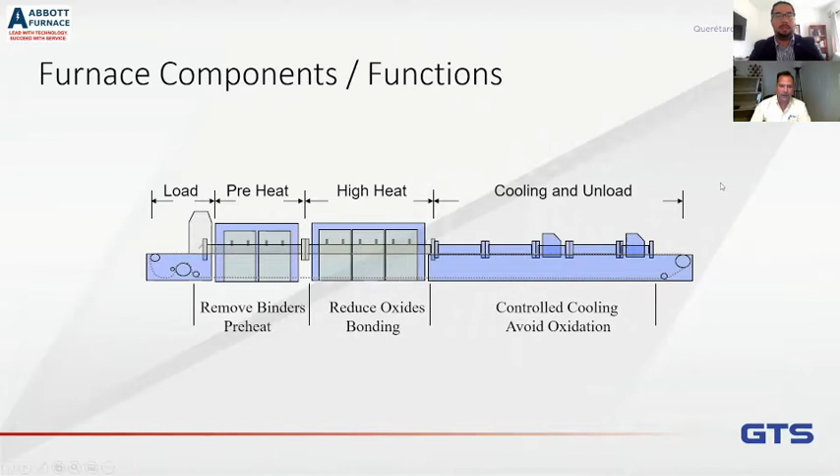Right, so from GTS's point of view, because that's what we do, the most important thing for us is temperature and atmosphere. So probably we need to talk about temperature, and temperature profiling is kind of a must. Exactly. A temperature profile is a graphical illustration of the furnace's performance. You can break furnace performance into three things: time, temperature, and atmosphere. Correct, and that time goes into both - it goes into the atmosphere as well as the temperature. So the only way that you know whether your product has seen the appropriate temperature for the appropriate amount of time is to do this temperature profile. Correct.

Now, one thing you need to be careful of when you do these: one mistake people often make is plotting temperature versus distance. Depending on the speed you're traveling, you could get graphs that look similar, but the actual time you are at temperature is significantly different. So you always plot temperature versus time.

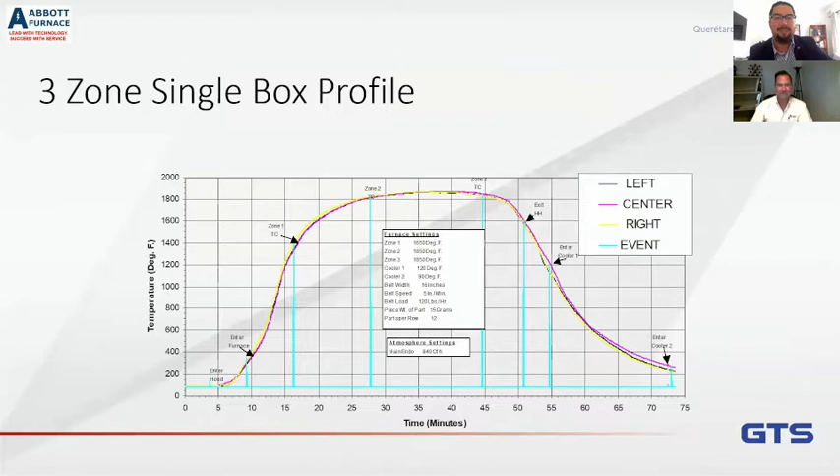So the next question is, why should we run a profile, or when? Well, there are 2 reasons you run a profile. The first is to establish a baseline. You should always run a profile when you're making good parts, because that tells you—you already know you're making good parts, you have a healthy process—so you should establish what that profile looks like that achieves a good part.

Then, in the future, if you have a problem, you can run another temperature profile and compare them to troubleshoot. You can say, well, in my baseline, in my good condition, in zone 3, I hit temperature X. But today, I'm not hitting that temperature. Maybe I have some elements out, or something has happened with the insulation. So I may not hit the temperature I need to melt the filler metal and braze.

We have always insisted that this is a tool, and it could be a proactive tool, because if you know this information from the very beginning, you know what your problem is, or is going to be. We really encourage you to run this at least every 6 months, because you'd rather plan a downtime as opposed to be forced to go down at a time that may not be good for your production. If you're proactive, you can stay ahead of repairs and plan things accordingly.

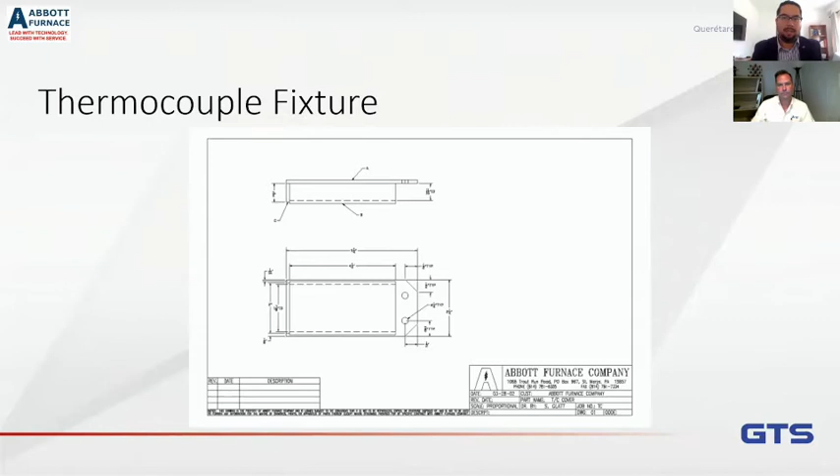Be sure that you're not up against the wall. You want to measure the inside, because so often, whether it's a fuel rail or some type of container, they're hollow, they're empty on the inside. So don't put that up against the wall, so it acts similar to a hollow device or a part. And then we put a little bit of insulation, just a little bit of fiber in the back, just so that the atmosphere, you don't get a chilling effect.

And that can be a computer, it could be a data logger, or whatever. Correct. So you mentioned something very important, that the length of the thermocouples will depend on the equipment you use, right? Yes. Because the most common, or cheap, data loggers are external data loggers. So you have the data logger outside the furnace, and you start feeding the thermocouples while the belt is running. But we also have those nice pieces of equipment that are wireless... they're not wireless, but it's a really nice tool.

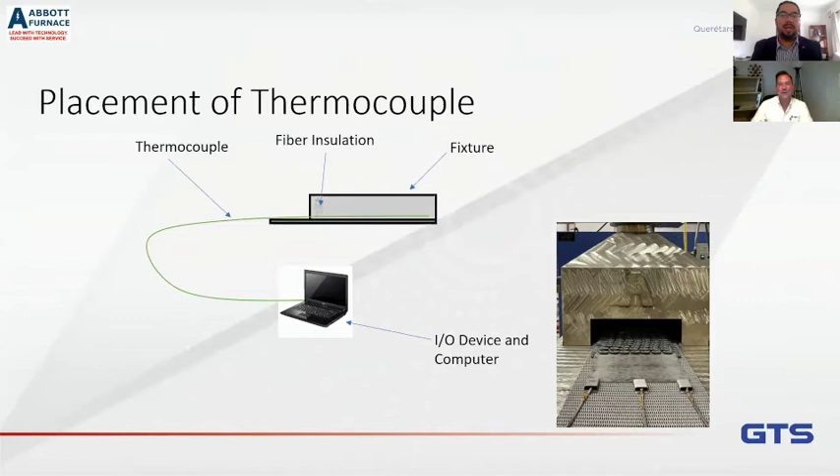Yeah, if we look at the types of equipment, you really can break it into two different schools, or two different technologies. One is a data logger, and the other would be thermocouples that go to an external device. And there are advantages and disadvantages to each.

For instance, the data logger, a common one is the Phoenix system. You can see here a photo of the Phoenix system, and that little data logger's big advantage is that it takes up maybe 2 to 3 meters of space on the belt. You can load ahead of it and behind it, so it makes it very convenient to run a profile. This is very, very widely used in the brazing industry.

Now, when you get into other industries like the heat treating industry and sintering, because of the length of time that they're going to sit, it's really nice. But there is a cost associated with them.

So if you want something very, very economical, much less cost, that's when people will go to thermocouples that come out to an external recording device like a computer, but the thermocouples are very, very long, and you are not able to load parts and have production while you're doing the profile. So you would load around the thermocouples, make sure that you load the same way each time, but you will stop your production when you're doing this technique.

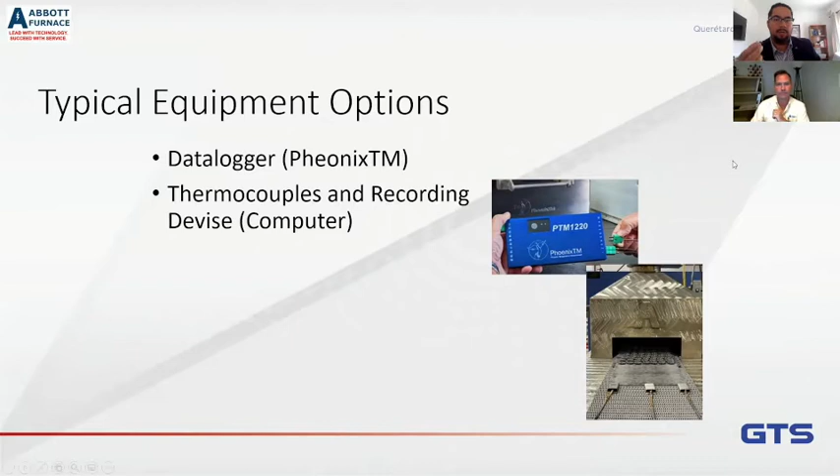Excellent. So, okay, we have our thermocouples, we have our data logger. What's next? Well, actually, this is one of the big advantages to the Phoenix system: there's software that goes with this, so when you bring it into your computer, you download the information. They actually produce a system that has telemetry, so it'll transmit as well, so you can do both.

You can actually get information in real time. And then, once we have the thermocouples and the fixtures, there's an enclosure. That's what we see in the picture, the data loggers inside of this to protect them.

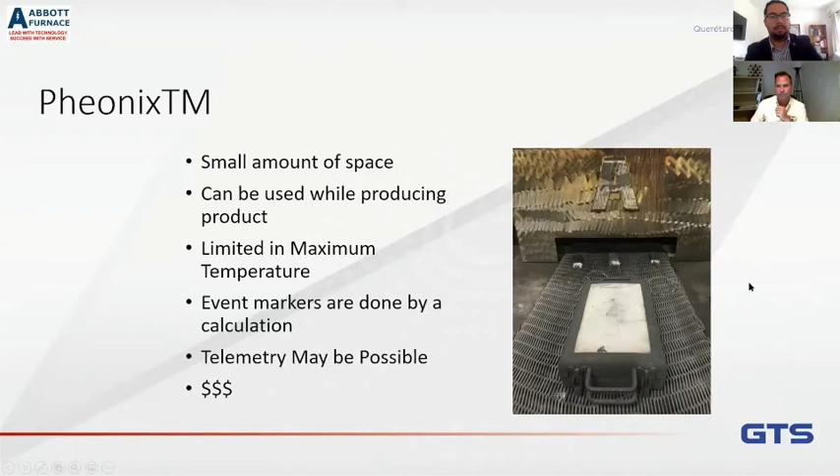In fact, here you can see how we would fit a data logger into a box, and you see it's very hot, and the thermocouples come out of the box, but the data logger is inside. So, like I say, you have the option to do downloaded data, or you could actually do wireless and telemetry with the Phoenix system.

So okay, we have the data logger, what's next? Well, once you get the data logger through, then what you want to do is look at that profile. You can see you're able to go in, put different event markers in, and see that thermal profile as it traveled through the system.

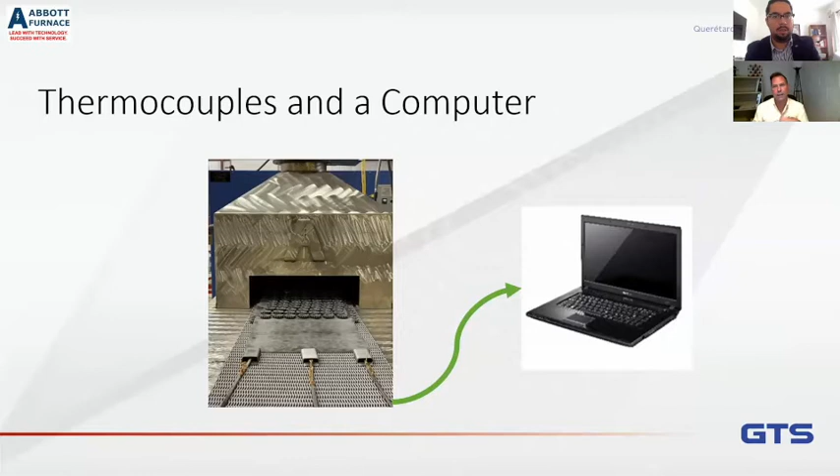And here, what you can see is in the case of being connected to the computer, you would have using data on the computer. You would then come in and record.

But this type of system, where you use the long thermocouples and the computer, is able to profile for extended time, because what happens is you start to have difficulty with the signal coming back when you get to event marking. You can actually use the thermocouple that's traveling through and mark it, so you have a physical indicator of position. Whereas with the Phoenix system, you have to do it based on belt speed and time.

But the other big advantage to this equipment is that the problem with the limitation of a telemetric system is that temperature is going to be your problem all the time, because there's a limited amount of time the box can resist temperature. For example, the longest time you can stay inside the furnace is about 4 hours for some systems. It really depends on the size of the thermal box, but that's something you need to think about when selecting the right equipment for you.

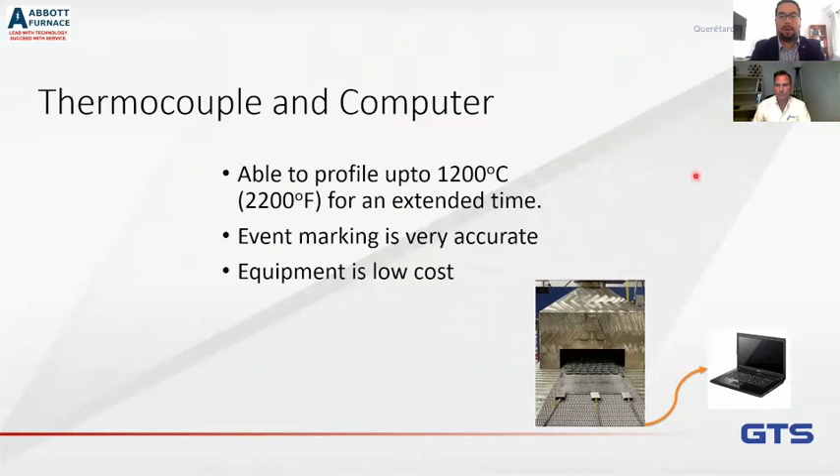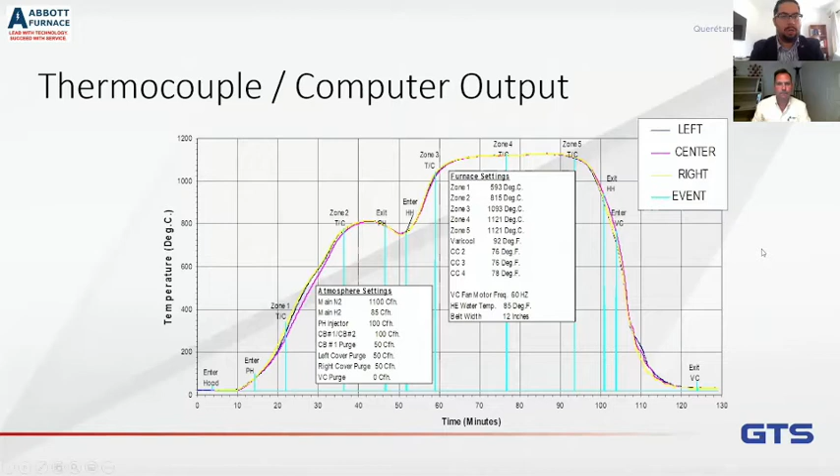Correct. So what would be, at the end, the overall procedure for the whole process? Yep, and like you had touched on before, the first thing we need to do is calibrate all of the controllers. Use calibrated thermocouples. You want everything to be traceable.

It's very important to always use the same atmosphere flow rates and the same atmosphere composition, because the atmosphere plays a large role in the way energy is moved throughout the furnace. For instance, hydrogen will absorb 14 times as much energy as nitrogen. So in cooling, if you had more hydrogen, the atmosphere will cool your product faster. However, in heating, once you've heated that atmosphere, when it comes forward into the hot box, it carries heat towards the front door even more than nitrogen would. So you always want the same atmosphere flows and composition.

Likewise, the same furnace loading. You want to compare an apple to an apple. Great advice, thank you.

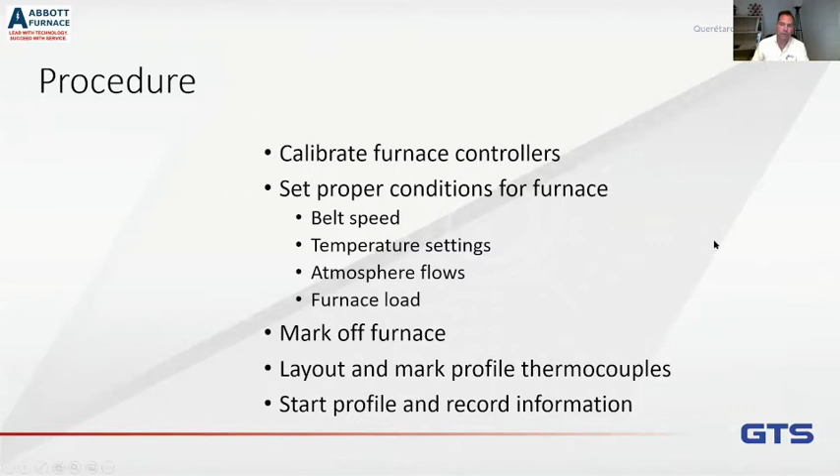So what's next? You have the procedure. I think one of the main things is to run your profile every time the same way. So exactly, when to do the profile? Well, you really should do the profile.

We really recommend that when you first get your furnace and start up your process, or if you've been down a while and turn your process back on and you're making a good part, do a profile. Mark that as success, this is a good condition. Then every 6 months, you should do another profile. That way you can be proactive in trying to head off any problems.

And you can compare that to your baseline. As things change, you can plan your maintenance so that you're always making good product. And likewise, if something does happen, if you have a failure or an issue, run the profile again to do the troubleshooting. That's really good piece of advice.

So this is for temperature. I think it's time to move to atmosphere. That's the other variable that always is going to be a pain for us. Yes, and they go hand in hand because atmosphere, you have reactions that occur in the furnace.

Remember what we said, we loaded the parts at the front of the furnace, and as we went through, we heated the product up and then we reduced the oxides. What's happening is we put our hydrogen and nitrogen in the back and they're flowing towards the front. That hydrogen will actually react with the oxides on the surface and form water. So what you see is the amount of water goes up as you go towards the front of the furnace, and the amount of hydrogen goes down slightly. That reaction is a function of temperature.

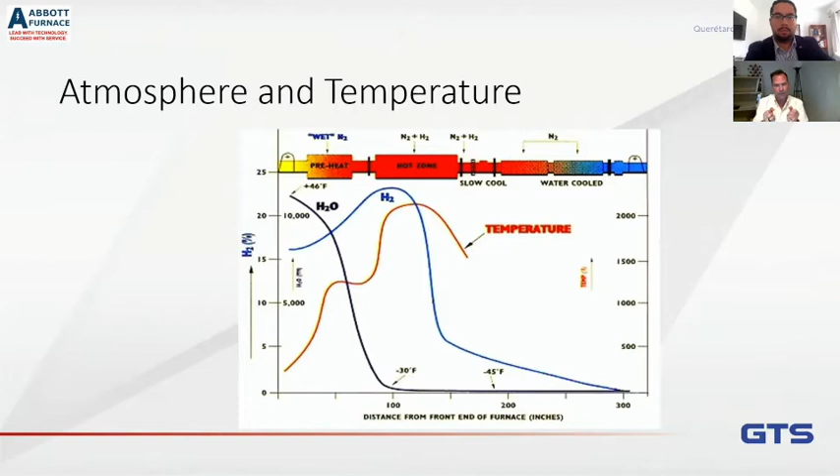But now you want to also look at atmosphere, because the atmosphere is the workhorse of your furnace. It's what reduces the oxides. It helps transfer heat, it helps flush away any oils that vaporize off, any of that. That does the work. Correct. Okay.

Perfect. So, well, we need to talk about why we use atmosphere. Yes, and that's why it's the workhorse, but it does two primary things: it prevents oxidation, and it reduces the oxides that are on the surface.

Correct, because in brazing, the first step is you heat up the product and then you reduce the oxides so that the filler metal can flow over the surface and form the alloy and form the bond. If you allow that oxide layer in there, it acts as a barrier between the filler metal and the base metal, and you won't get bonding. So those are the two principal functions of the atmosphere: keep air out of the furnace, and reduce the oxides on the surface of the metals.

The purpose of this webinar is not to talk about the science behind brazing, but just to keep in mind that the surface condition is basic to having good brazing. That's all you need. But maybe later we can talk about all the phenomena that goes into brazing, the wetting, the diffusion phenomena, that stuff we need to know. Yeah, because we need to understand what is happening in order to solve the problem. But probably for the next webinar, we can talk about that.

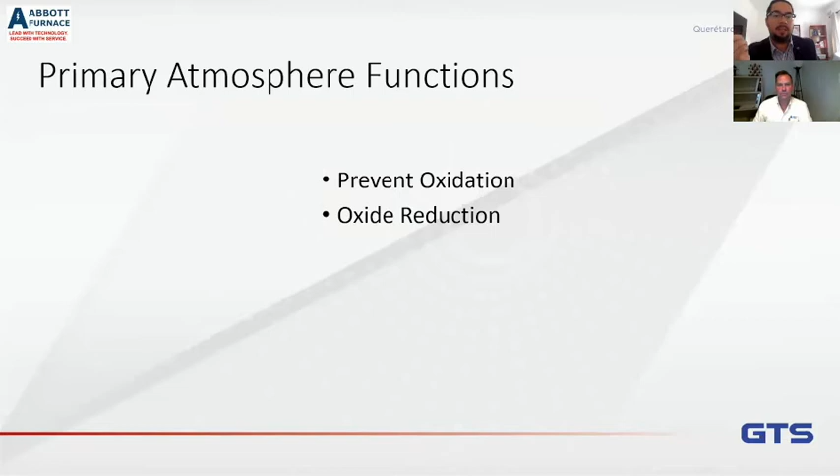So, well, okay, we know atmosphere is important. So what do we do with it? How do we know it's right? Well, that's where the atmosphere analysis or the atmosphere profile comes in.

Okay, and so what we're going to do is the atmosphere analysis is a little bit different than the temperature profile. Here, what we're going to do is take a stainless steel or inox tube, and we're going to insert that from the front of the furnace and slowly move it through, gathering a sample at each location as we travel through the furnace so that we can look at what the atmosphere is in each location.

In every section. But because it takes time for that atmosphere to get through the tube, we have to allow it to sit there for a while. So it's not going to travel through fast like the thermocouples do, or the Phoenix system. You insert it and let it stabilize, then move it again and allow it to stabilize, gathering that information. But it's very important because this is what gives you the information to tell you if your process is correct, if the atmosphere is correct in each location, in conjunction with the temperature profile. Correct.

Correct. So, I think we are all familiar with the temperature profile, but you always bring a good concept, that atmosphere profile. Can we talk about that a little bit?

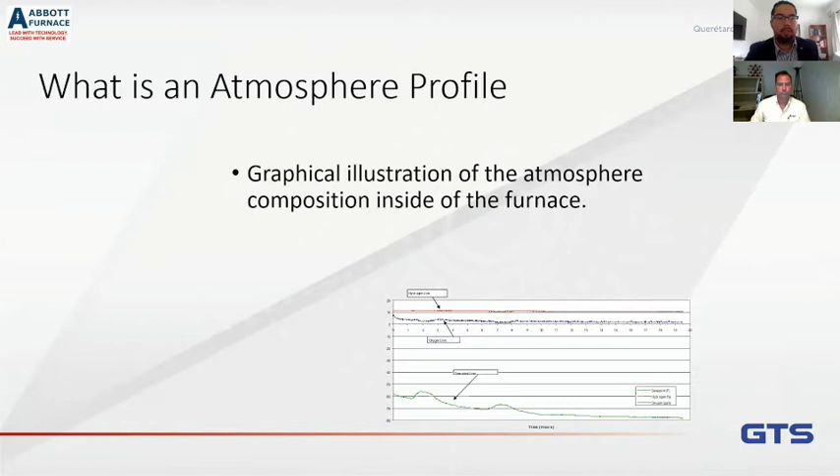Correct. So what do we need to do that test? Well, the most common equipment is actually the dew pointer. But also, just like in the previous slide, people will look at the hydrogen level or the oxygen level. So you'll need a hydrogen analyzer, an oxygen analyzer, a dew pointer, a copper tube, and a stainless or inox tube. That inox tube, that stainless tube, is what goes into the furnace.

And because it's very stiff, we connect the copper tube to it so that we can have some flexibility to connect to the measurement devices. The dew pointer, for instance, sits external to your furnace, so you need to be able to connect up to it and give yourself some flexibility. So basically, you have the copper tubing outside the furnace in order to move a little bit, and the stiff part, the stainless tube, is going to be inside the furnace.

Correct. Usually these kinds of analyzers are commercial, from various manufacturers. It's usually an infrared sensor or a relative humidity sensor. They'll typically use thermal conductivity or infrared, that kind of thing—it just depends on the technology. But there are a number of different commercial pieces of equipment available. And if I had to list them in order of importance—these are upside down—I would say dew point, oxygen, and hydrogen would be last.

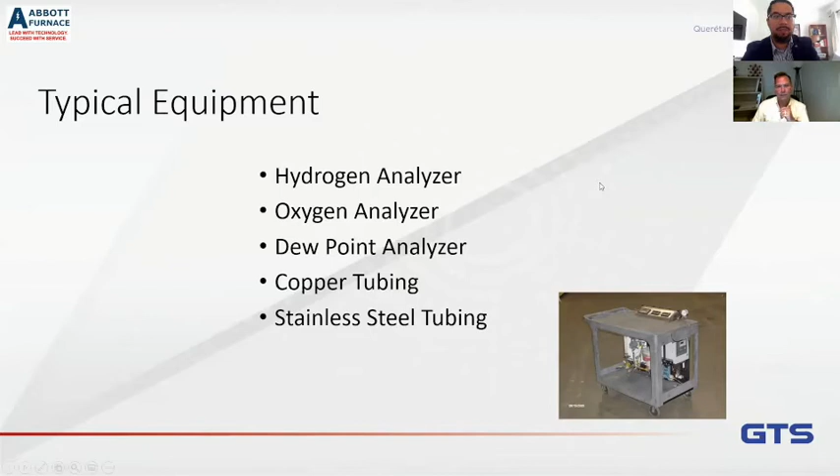So that piece of equipment you have there, is that something you use for validating your furnaces and Abbott furnaces? Yes, I'm just showing this as an example of a sample cart. There are two ways to put these systems into operation. You could mount the different devices onto the furnace and have a dedicated sampling system, but that equipment you've purchased, that dew pointer, is only for that furnace.

Another approach is to do a cart. So what this is, it's a cart where you put the different devices, and then you can move that cart from one furnace to another furnace. It's more flexible, more functional—you can use it throughout your facility, not just on one furnace.

And these sample carts can be equipped to do atmosphere balance, so you can use atmosphere composition as well as optimize the cost of your atmosphere, because for instance, hydrogen is twice the cost of nitrogen. So by balancing your furnace and only having that expensive hydrogen where it will do its work, you optimize it and you're not flowing it out the back of the furnace and wasting it.

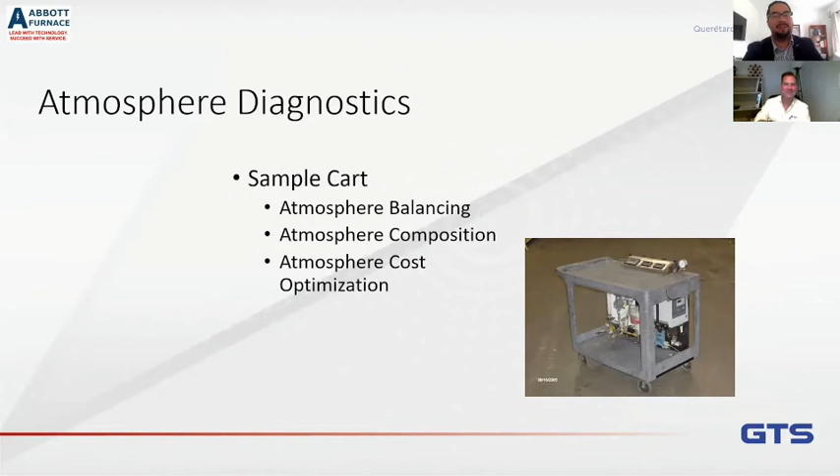Yeah, but this allows you to optimize and hopefully save some money. Right, so can you tell us a little bit more about your cart?

Yes, just as an example here, you can see this has some digital displays, so you can see the readout from the various devices: dew point, oxygen, hydrogen. This is the oxygen analyzer—there are different manufacturers of these. The dew point analyzer is this portion, this white portion with the tube back here, and the cell is actually up inside. And this canister, this gray device here, that's the hydrogen analyzer.

And this cart is actually equipped with an I/O device, so you can do the data logging as well. You can set your laptop here, your computer, connect up, and run the thermocouples through this device. So you can do both—you can do the atmosphere profile as well as the temperature profile with this.

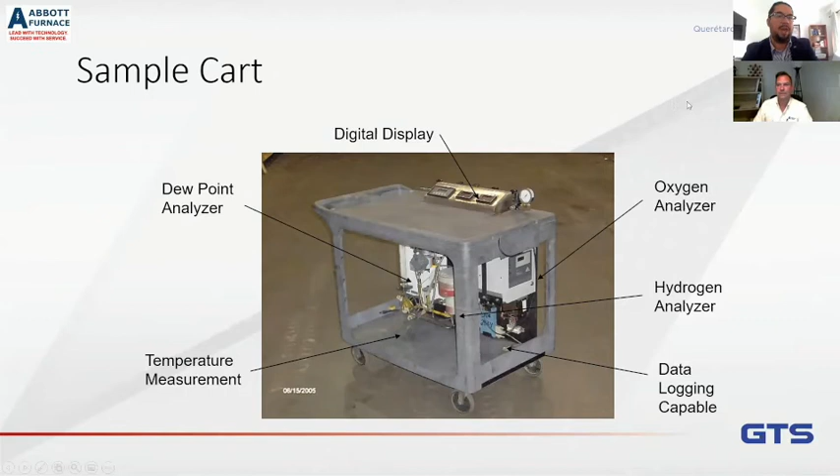Which will be ideal, right? Yes, correct. Okay, we have the equipment. Now what's the baseline in case of atmosphere?

The key here is, just like in the thermal profile, we want to establish a baseline condition. So when everything is working, do an atmosphere profile, so you know what that atmosphere composition should be throughout your system. Check the dew point and oxygen at all of the incoming gas as well. That's one of the first things when you go to do an atmosphere profile, always start at your incoming gases to make sure you're not feeding garbage in and garbage out.

I've seen this happen, especially if you're using tube trailers. They bring in a contaminated trailer and it ruins the atmosphere in the furnace. It'll show a high dew point in the furnace if you look, but it's not because there's a problem in the furnace. You're bringing in contaminant. So always check your incoming gases.

Then determine the profile, like we mentioned, and check the dew point and O2 content in all parts of the furnace. Oftentimes you can do that profile, but if you want quick checks, many furnaces have the ability to just do a sample of the atmosphere in the coolers. You could check in the cooling section, or maybe some have the ability in the transition between two boxes of heat. You can do quick checks just to validate, but that does not replace the atmosphere profile that goes all the way through the furnace. Agree.

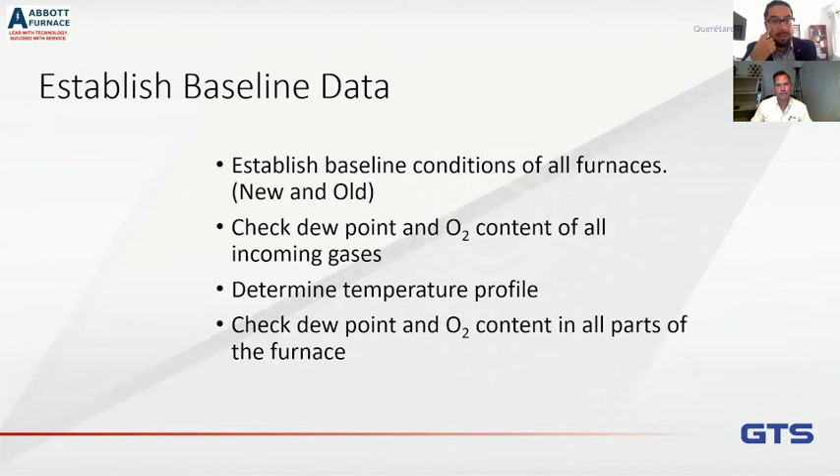So when we discuss furnace brazing, you always bring a really nice example of before and after. Can you show us that? Yeah, please. Thank you.

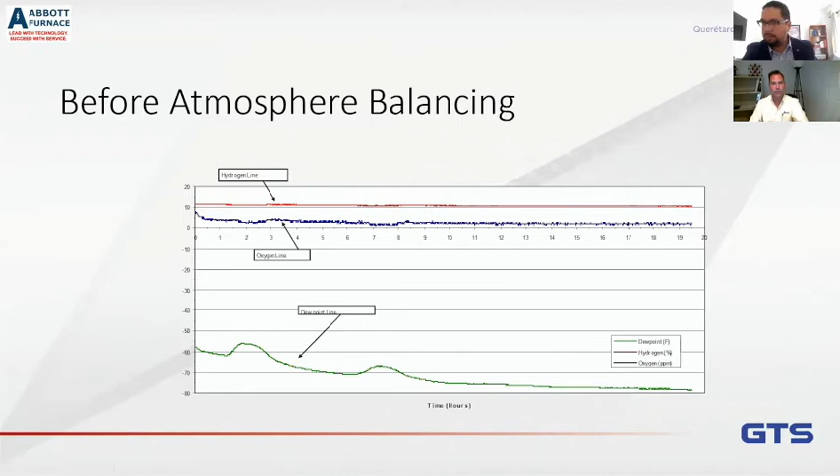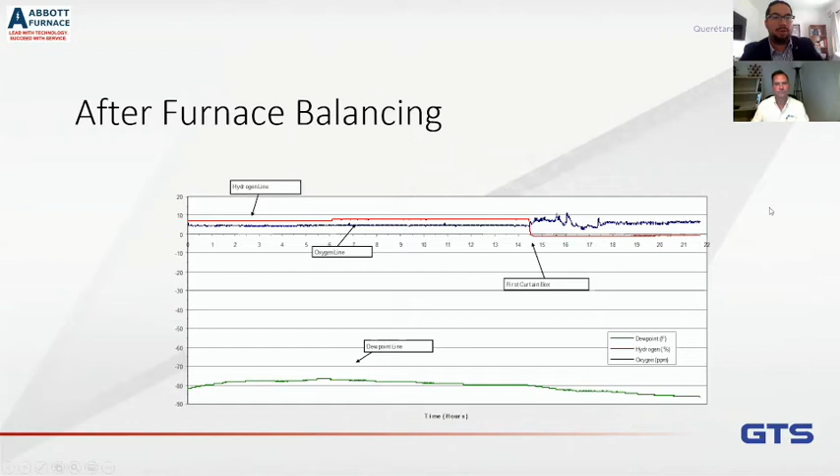That's a really good point, cost, but I think everybody's waiting for us to talk about problems. Yes, and the atmosphere is directly related to a lot of the issues in brazing. That's why the atmosphere profile and atmosphere troubleshooting are so important.

Here are some examples, and we'll go through these in detail: frosted parts, oxidation, belt oxidation, flashing, inadequate braze, and nitriding.

So now the surface isn't as smooth. When it goes into the high heat where you have that hydrogen doing its work, it reduces that oxide, but it creates little cavities or little bumps wherever the oxygen was. And now it reflects light differently than something that did not oxidize. So that's why you get this dull appearance, okay?

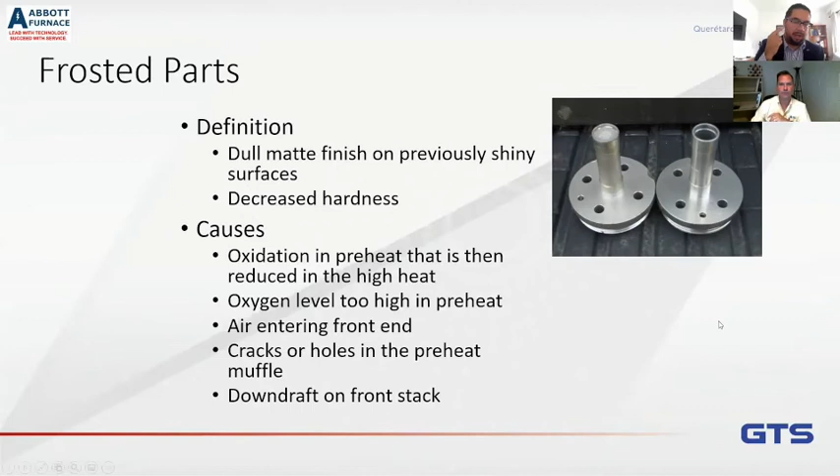The reason is, if I oxidized in the front of the furnace, we would have a clean part, but it would be frosted. If I oxidized in the high heat section, it's going to look black, because the temperature is very high and everything's very reactive. The only time I'm going to get a color is in the cooling section. So it definitely occurs in the cooling section, but that means it could happen from two ways - it could be either air, or it could be water, because those coolers are water jacketed. So if you have a cooler that's failing, you could cause oxidation from the water leaking in.

It's a surface effect, and it will vary with part weight and temperature. So here's where your temperature profile will go hand in hand with troubleshooting, because certain colors will happen at certain temperatures, and so we can use that. Basically, there are three things that could be discoloring this - it could be air, it could be water, but it could also be carbon dioxide.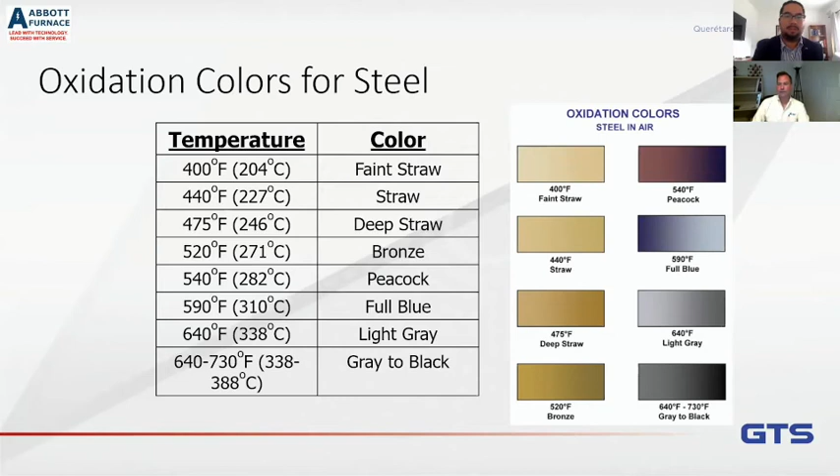I have seen parts really, really, really bad oxidized. If they are really heavily oxidized, if they're black or gray, or maybe even you'll see them peeling, you'll see the oxide flaking off. That means that it happened in the high heat.

Because if you recall from the color chart, you notice how it keeps getting darker. Once you go very high in temperature, that oxide becomes very dark gray to black. And that indicates that you have a leak in the high heat area. It could be a hole in your muffle, or it could be some other cause or source of getting air in there. What's the most common case?

Typically, if you see this kind of oxidation, it's due to an air leak in the muffle. Or if you have a sealed box, it might be that one of the covers is leaking. It's typically some air gaining access to the high heat.

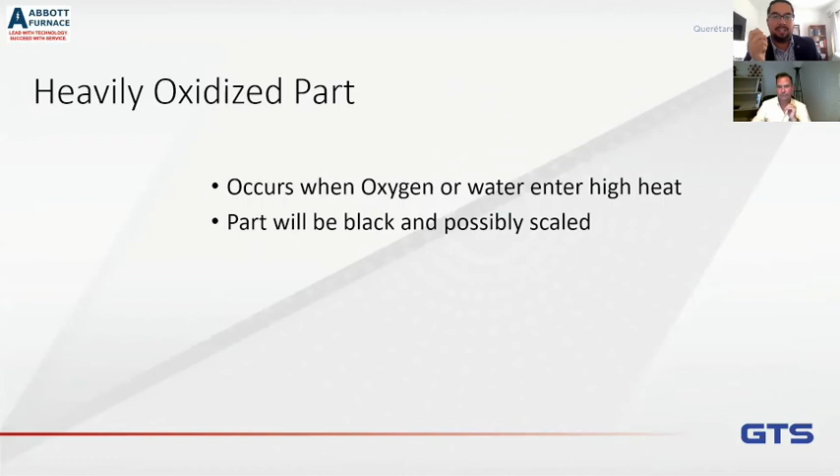Also, when we talk about these kind of issues, you also discuss the copper and stainless steel test, which I think is very pragmatic. I think it's a test that is not used enough. I agree, because this is a way for you to troubleshoot your own furnace, and it gives you knowledge so that when you do have to call for help, you have information to share, and it really speeds up the solution.

The way this is done is we're going to determine if the oxidation occurring in the cooling section is caused by air or water. So we have a color, we know the temperature - like our example before, it was peacock, we knew it was in the third cooler. But is it a water leak or an air leak? Do I have a leak at a flange, or did I wear the bottom of the cooler and have a water leak? This will actually help you figure that out.

So the first thing you want to do is reduce the furnace temperature to 1900 degrees Fahrenheit, because you want to be below the melting point of copper. Take your highest temperature zones and just lower them below that melting point. Then you're going to take a piece of copper - it could be a piece of pipe, a shim you've bought, it can be anything, just pure copper.

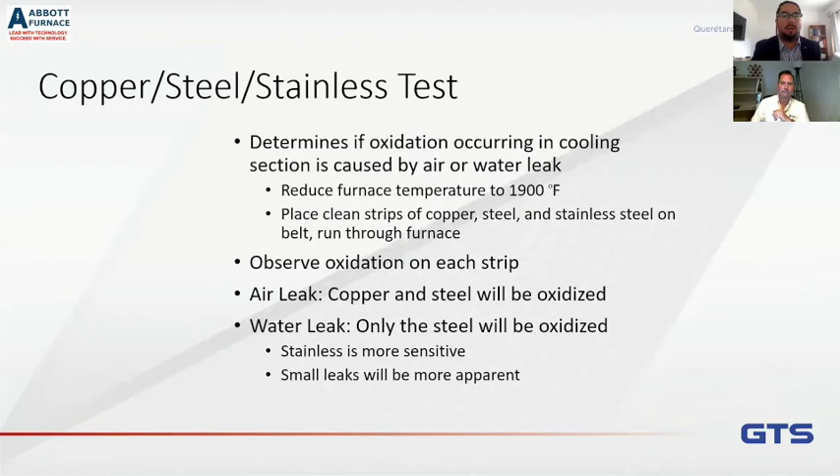Beautiful, very simple test, very straightforward. I like it. So this is really good when talking about problems with parts, but customers usually come with the problem that the actual belt is discolored. I mean, the belt is made of stainless steel, it contains chromium, so it's very reactive with any kind of water or oxygen.

Many times, if you're brazing carbon steel parts, your belt will change colors long before your parts will. So you should always watch the color of the belt. If the belt is dark and the parts are bright, that means you're just starting to get some type of oxygen source in your furnace—it could be water, air, or a leak somewhere. But if your belt is starting to change colors and your parts aren't, that means it's a small leak. It gives you the opportunity to catch this before it ruins product.

If the belt is clean and you have this really adherent oxide, typically that's what's happening in the front of the furnace, and it's oxidizing so much that you don't have enough hydrogen in the furnace to clean it. So if it's very adherent and you can't clean it, it's typically happening in the front.

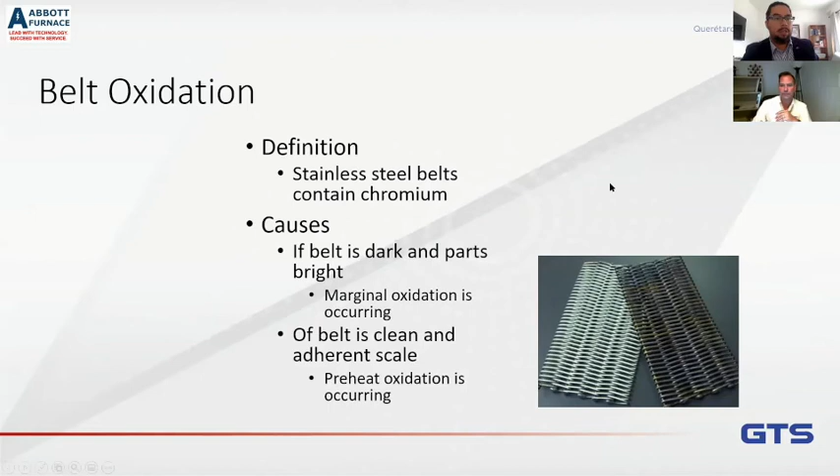Correct. So we're talking about discoloration, oxidation, flashing. Yes, flashing—when you look at a brazed part and you see that the filler metal has just run everywhere. I've had some people say, but it makes the prettiest gold parts, right? Yeah, maybe it does. But what has happened is the atmosphere is so reducing that it's cleaning the surface so much that the filler metal just runs everywhere.

You could be too high in temperature—remember, we talked about being too high isn't good as well. You could actually have too much hydrogen, you could be too reducing, or you could just be sitting at your brazing temperature too long, and it's now cleaning things so well that it runs everywhere.

So really the solution—when you tell a production person that they're allowed to increase the speed to get rid of a problem, honestly I've had them look at me like, really? Yeah, you're lying, right? I'm never allowed to increase speed, right?

But yeah, you can increase speed, reduce the time that you're in that reducing zone, or lower the temperatures, or reduce the amount of hydrogen. But I would do it in order—I'd start off by maybe reducing the hydrogen a little bit because that's expensive, and then increase your speed a little bit, and then only adjust your temperatures. Because lowering the temperature is going to save you some money, but nowhere near as much as the atmosphere or the speed. 72% of your cost in your furnace is atmosphere.

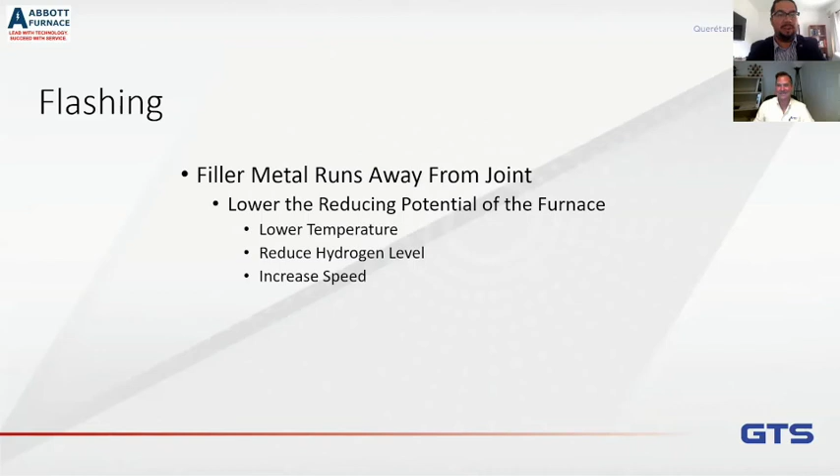Let's talk about nitriding because that's kind of particular. So nitriding—some grades of stainless steel that have higher chromium levels will actually react with nitrogen in your furnace to form a chromium nitride, or a chromium carbonitride. What's happening is between 400C and 900C, the nitrogen will go down and hook on to the chromium to form a chromium nitride.

Now, why is this a big deal? Well, the problem is if you nitride the surface while you're entering the furnace, it acts just like an oxide contamination and the filler metal won't flow. But if it doesn't happen in the front, because you're going from 400 to 900, it could happen in the back.

And you say, well, I've already brazed, what's the problem? Well, the problem is if you form the nitride as you're cooling, that's because the way stainless steel or inox works is that the chromium will, as it comes out of the furnace, oxidize, and it forms a very tenacious sealed layer of chromium oxide that prevents oxygen from getting to the base metal underneath and protects it. The wonderful thing about inox is that the oxide is bright and shiny. People like it.

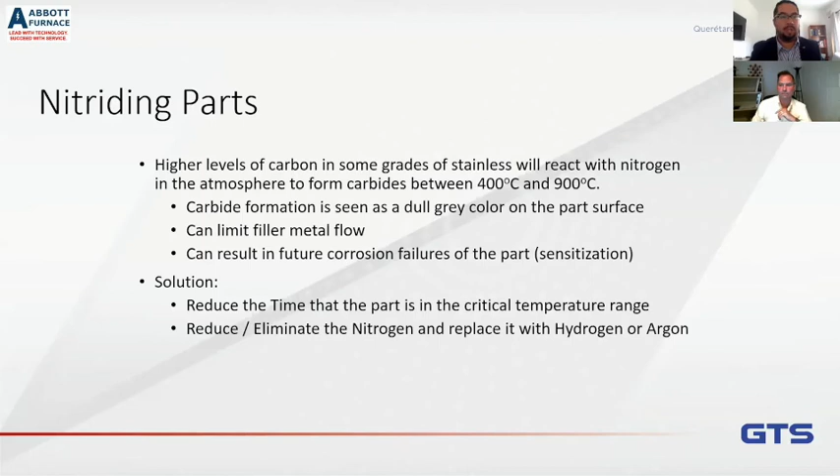Okay, great. I think we have covered all the troubleshooting. We've been talking a lot, so just to close, we're going to give a little time for the audience to ask questions, but let's make some conclusions first.

So basically, if you go away with anything, understand that you need to establish good baseline conditions, which include a good temperature profile and a good atmosphere profile of your process when you're making good parts. If you then perform routine checks—every 6 months a temperature profile, at least once a year an atmosphere profile—that will allow you to hopefully schedule downtime and not be surprised by it. So you have control of your destiny.

And then when a problem does occur, do the temperature profile and the atmosphere checks to isolate the problem, and then use some of the tools that we gave you to locate the problem and address it.

Beautiful, excellent. All right, so let's give a minute to hear the questions from our audience.